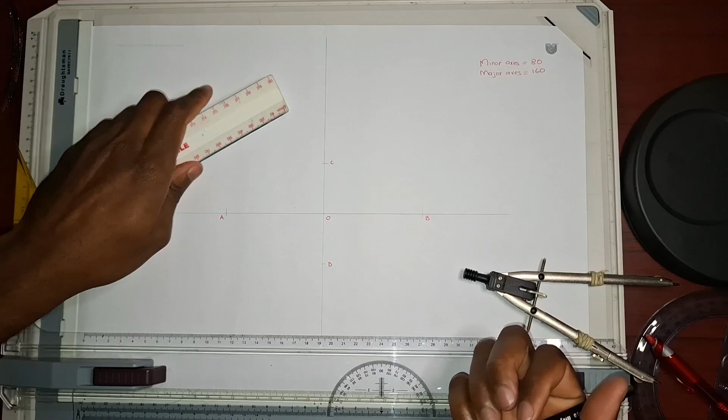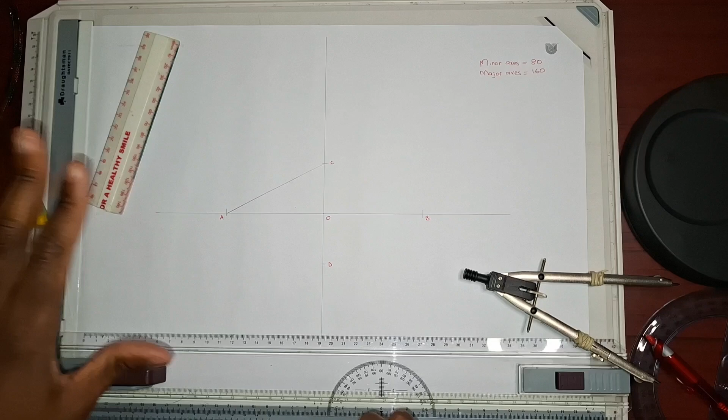Now, step number 1, you are going to draw a line from A to C. That's step number 1. Draw a line from A to C. Just like that. Now you can do this on the other side, because that's a question I usually get. You can also do this on the other side, right? I just prefer it when it's on this other side, right? You can do it either way.

So now you take your compass for step number 2. You extend it to point A like that, and then you draw an arc until it cuts that vertical line right there, right? And that intersection right there, you're gonna call it point E, right? Now you can also take it from this side like that. It's still gonna be the same thing, right?

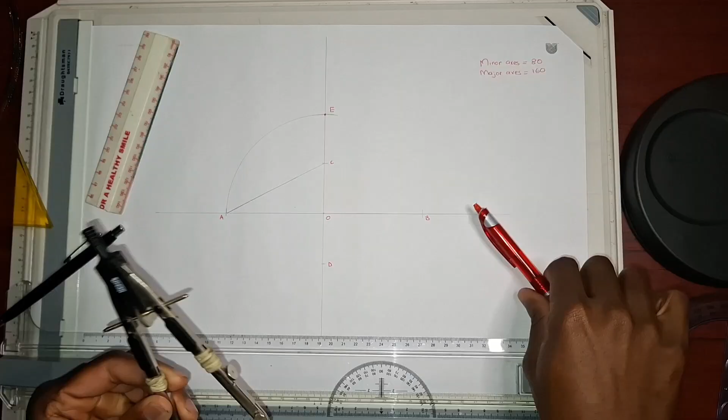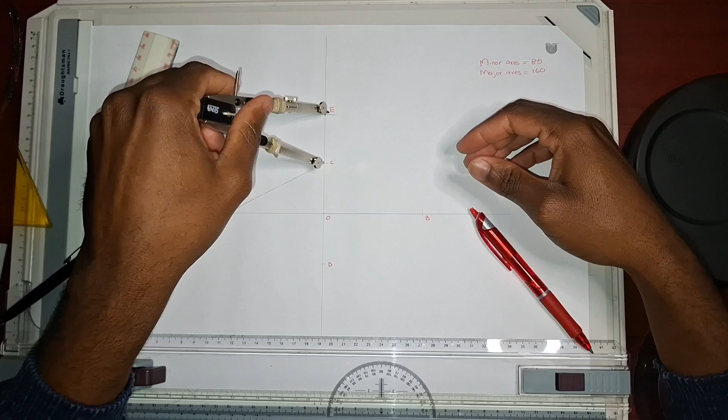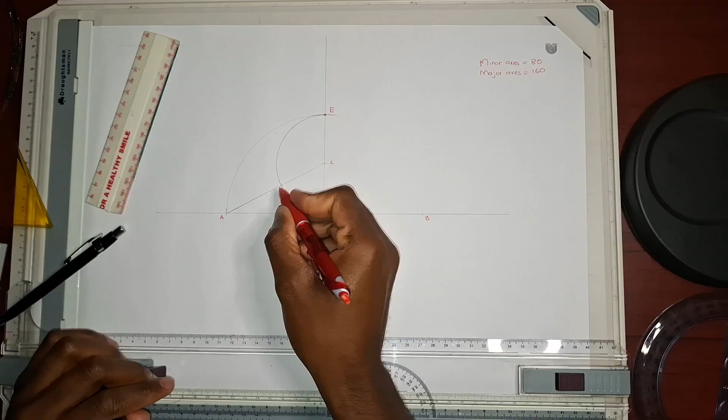And then step number 3, you take your compass, you place the compass needle on point C, right? Place your compass needle at point C, and then you extend the pencil side to point E. Just like that. And then you make an arc like that. The intersection of this arc and line AC, right there, you call it point F.

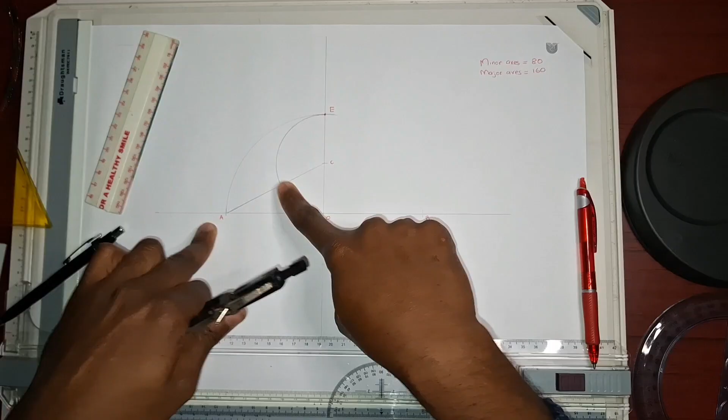Step number 4, you are going to bisect line AF. Now, we usually see a common mistake among students. They attempt to bisect AC. Please remember, you are supposed to bisect AF, right? Now, you take your compass. When you are bisecting a line, you are supposed to open your compass to more than half that length, right?

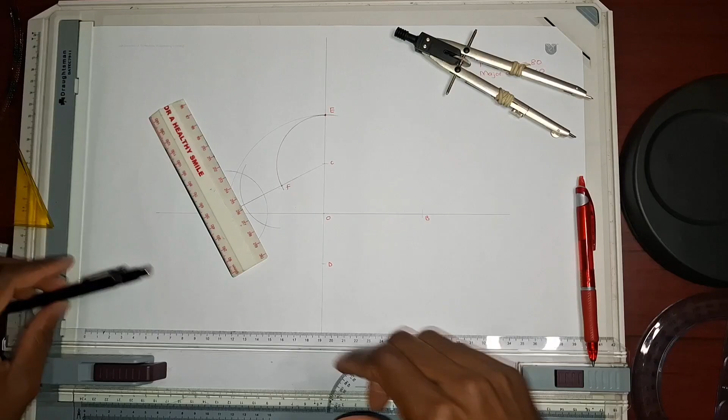And then you make an arc like that. Then you lift it, put it on the other side like that. You make an arc just like that. And then you draw a perpendicular bisector. Now this perpendicular bisector, you are supposed to draw it until it intersects the vertical line. All right, should be fine right there, just like this, right? So now mine did not intersect. That means I have to extend that line.

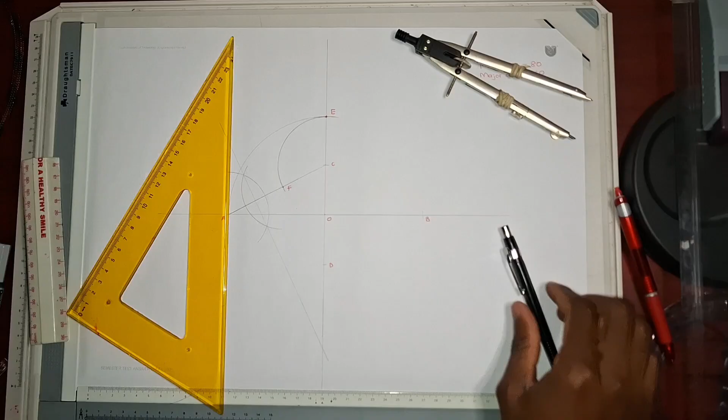Extend it just like that, right? Now this intersection... By the way, I think I forgot to mention, they call this method a 4-center method to draw the ellipse, right? Meaning the goal of these center lines is to find those 4 centers. They call this the 4-center method.

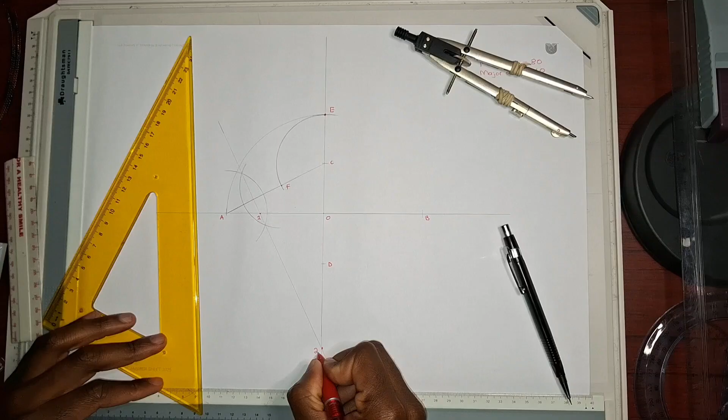So now this intersection between the perpendicular bisector and the horizontal line, it is your center number 1, right? The intersection between that perpendicular bisector with the vertical line right there where I extended, it is your second center, right? So you are supposed to determine the other center number 3 and center number 4.

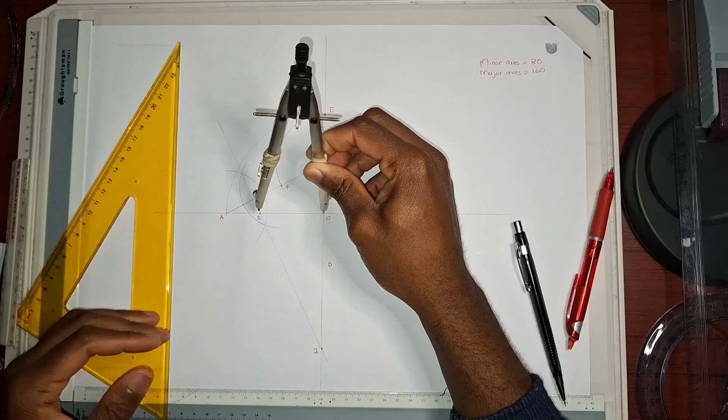To do that, it's much more effective if you use a compass like that. Place your compass and then you extend it to center number 1. It will be on the same position on the other side, right? And then you take that measurement from 0 to 1, and then with it you make an arc on the other side, and then that will be your center number 3.

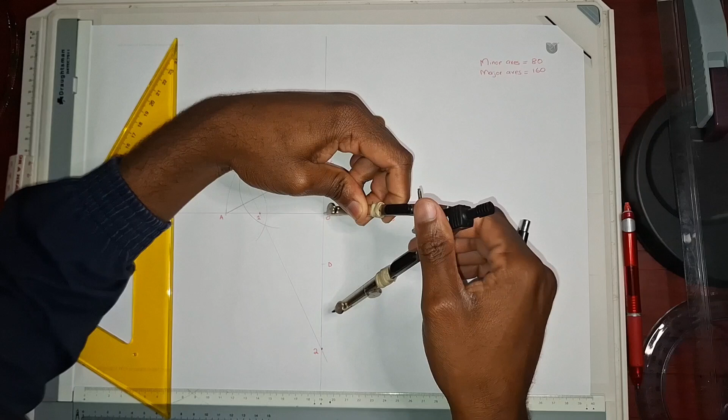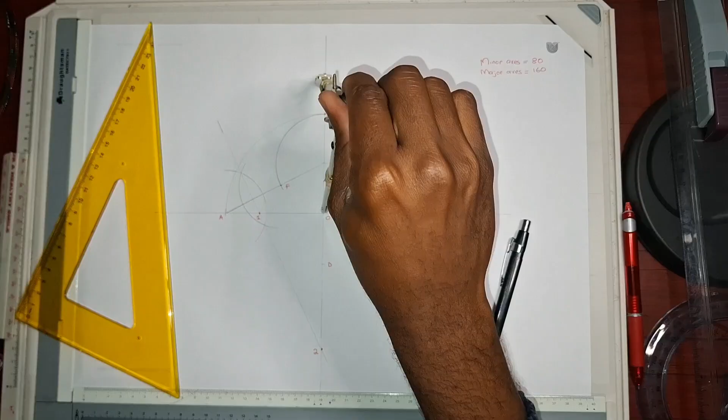For the other one, you do the very same thing. Place your compass right there, extend it to center number 2. I hope you have a bigger compass. If you don't have a bigger compass, remember I taught you about scales. You are supposed to use a scale and scale this ellipse down. Reduce it so that your compass will be able to accommodate it. So that intersection will be your center number 4, right?

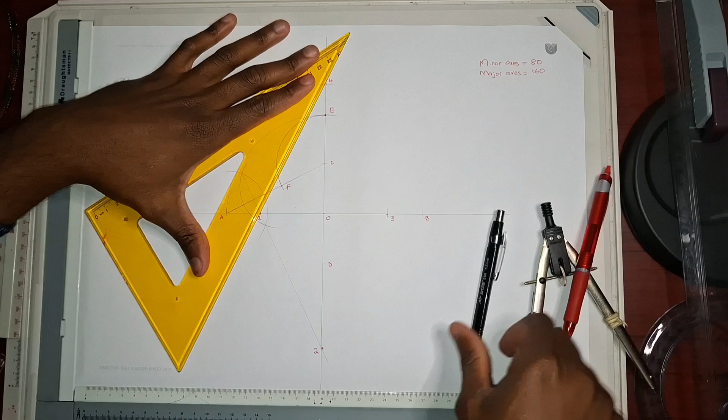The following step, you're supposed to draw a line from 4 passing through center number 1, like that. Then you also do the very same thing this side, from 4 passing through center number 3, like that. And then from center number 2 also passing through center number 3, right? Shouldn't be that hard.

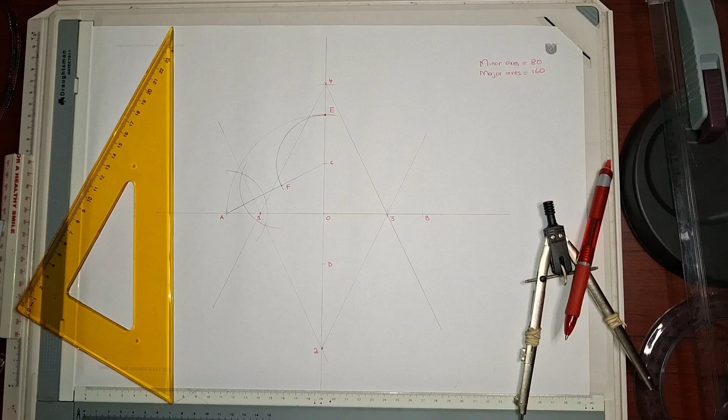So now you have your constructions, you have all your centers. Now it is time to draw your ellipse. Now you take your compass first. We are going to center number 1 first. You place your compass needle at center number 1, you extend the pencil side to point A, like that, and then you draw an arc.

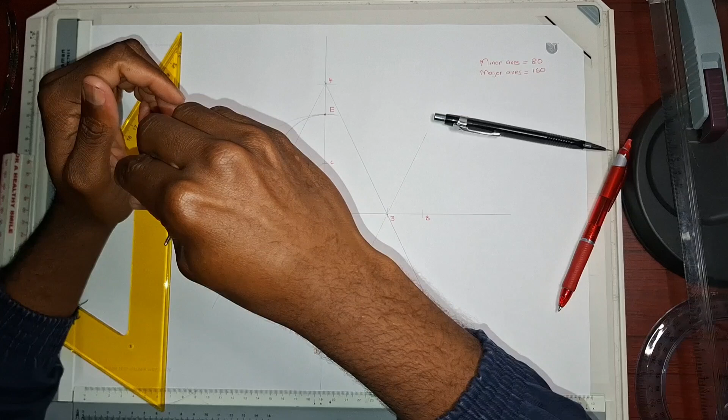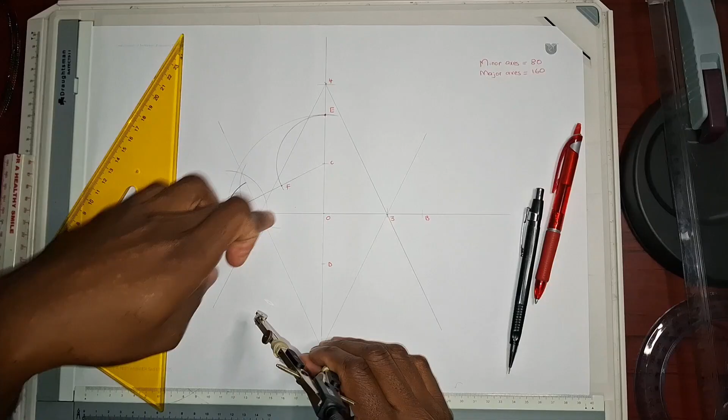Notice where my arc starts and ends. Starts right there and right there, right? Don't forget that. Now going to center number 2. By the way, you can move from center number 1 to 3 or 4, whatever. I'm just using the sequence. Doesn't really matter. Now you see my compass is beginning to not want to get there, but fortunately it did.

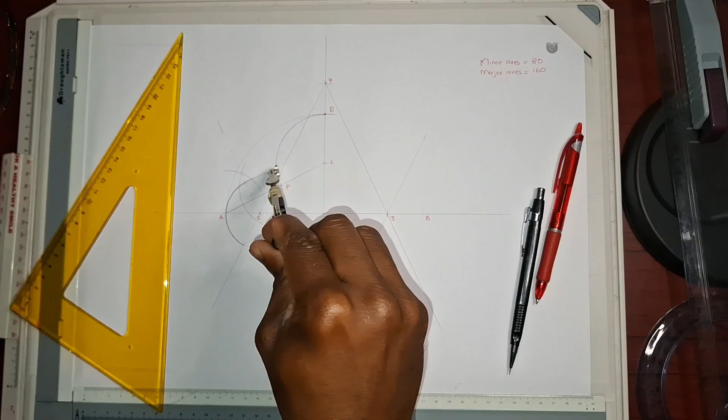So now it gets there. It's supposed to pass through C, right? So you extend your compass from 2 to C, and then you join. I think while I still have these measurements, let me just take it to the other side, to number 4. And then it's supposed to pass through D, right? Place it right there.

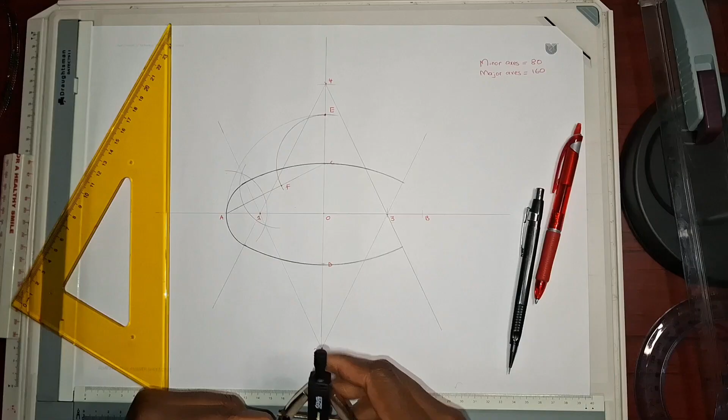It is okay. It is slightly above D there, but that doesn't really matter. Don't stress too much about it. If you encounter something like that, just finish your question or your test, submit. Don't start over. It really won't change anything.

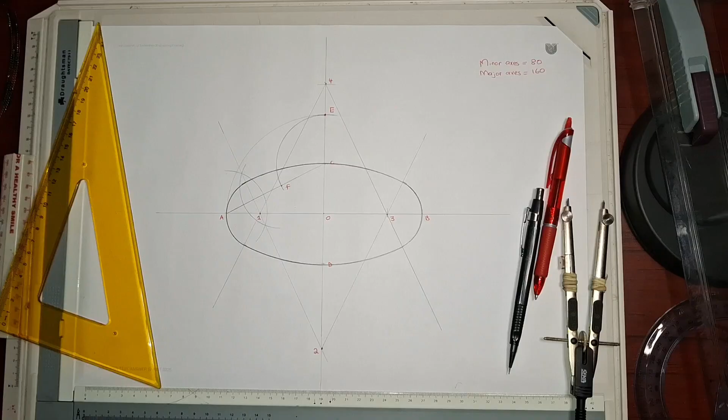Now you place your compass right there, extend it to B, or just extend it to there. It really doesn't change anything, right? Or extend it to the other side. It doesn't change anything. Then you draw. Right. So that is how you draw an ellipse. They call this the 4-center method.